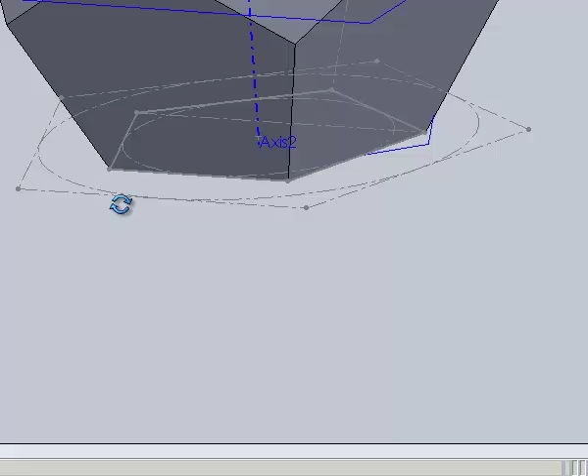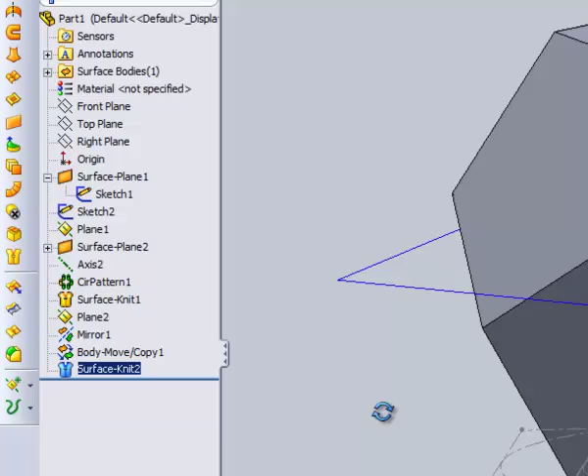Okay, in this second video, I'm going to show you how to create a flat pattern of your dodecahedron rod. Before we do anything, let's make sure that you've shelled your part, or your part was basically all knitted together. Your part should be one solid surface body. So if I expand surface bodies, I should see a surface knit here.

I'm going to go back into and edit this feature, and again make sure that when you form this, you say try to form a solid, so it is a solid mass. Okay, now let's shell the part at a 32nd of an inch, 0.03125, and accept. And now, like before, you should have wall thickness, and yes, we do.

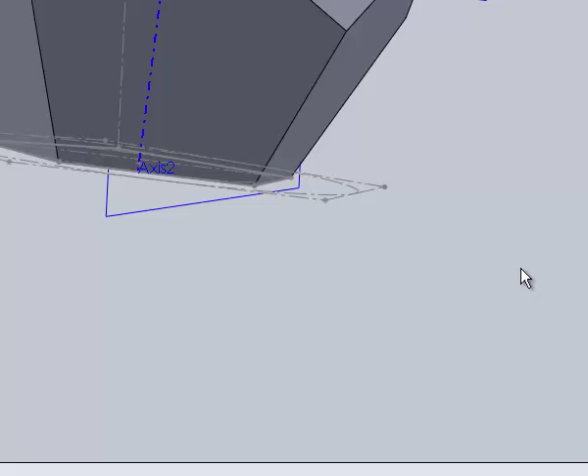Okay, now we're going to turn off our surfaces. So come up top, right. Turn off surfaces and right click and turn on sheet metal. Now we're going to do a command down here called rip. Create the gap between two edges. So SOLIDWORKS will be able to lay this part flat as a flat pattern or a net. So we're going to rip.

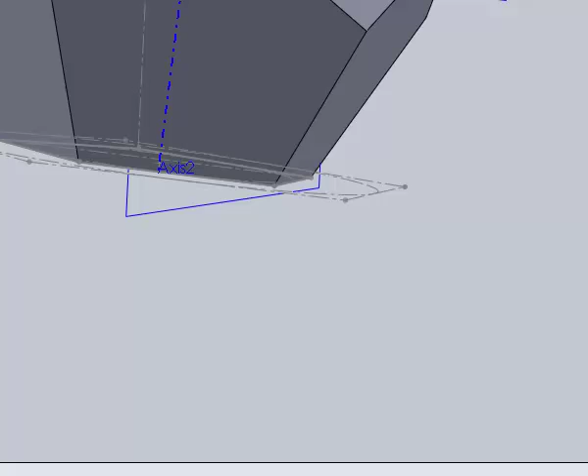You're going to go along the belt here and just start picking edges that are going to be ripped. We're going to keep this edge and this edge together because that's going to connect our two flat patterns of our six regular polygons. So let's keep going around. Oh, we gotta grab this edge and selecting the edges.

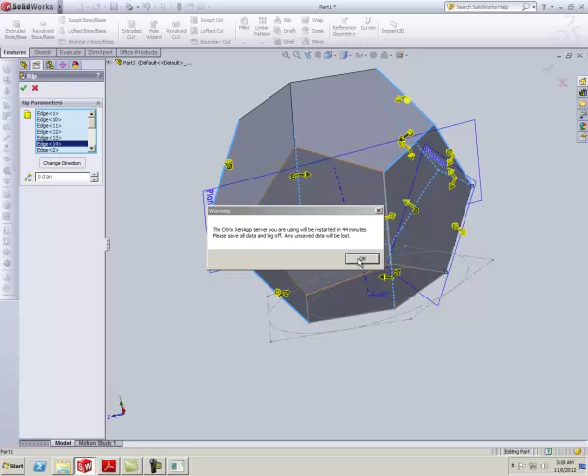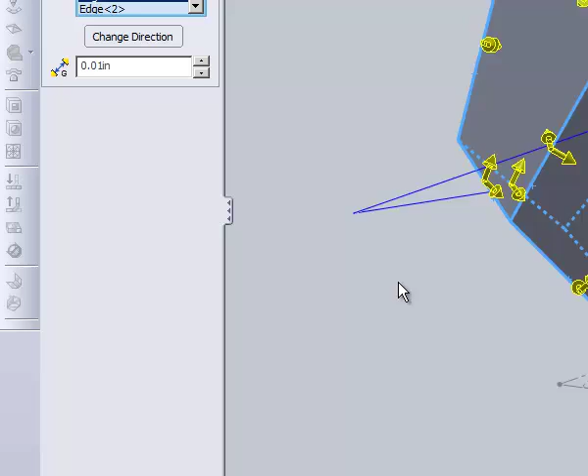You have to try and get your orientation. So there's quite a few edges that you have to select here. But again, we're going to leave this one right here connected, so our top and bottom of our flat patterns are together. Put a gap in here, a large gap to start with, so you can see what we just did.

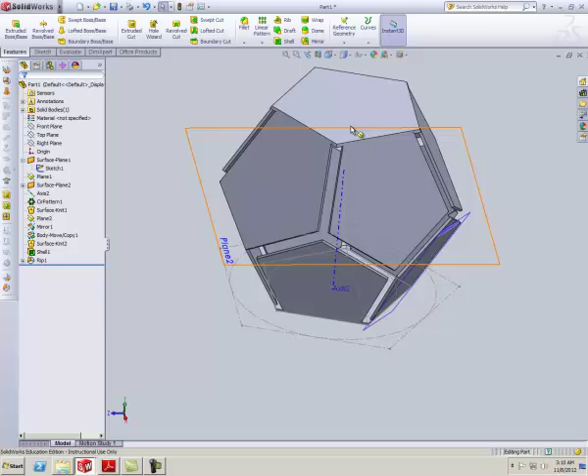Alright, now look at all those. We just create a separation, so when we lay this guy flat, it can lay flat. SOLIDWORKS knows how to do that. Alright, now we need to clean up a little bit of these edges here. So there's what's called a relief inside there, so they can be folded. Alright, so let's go back to sketch.

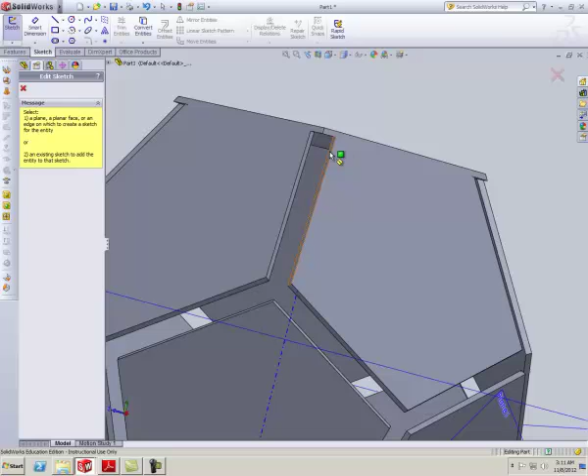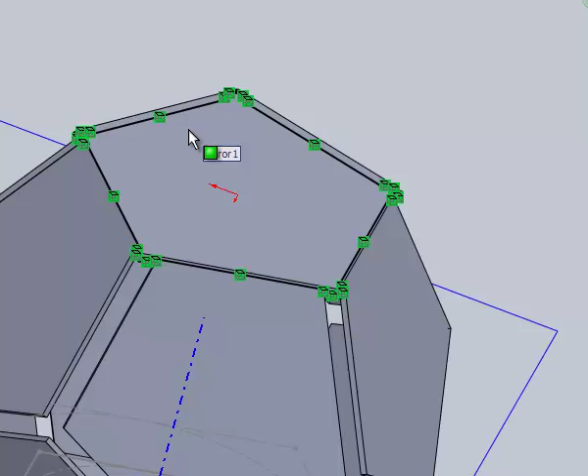We're going to start a sketch on this surface, on the underside of the inside of the top or the bottom. And then you're going to select a command called Convert Entities. You're going to convert the entities. It's basically make an outline of that face. You use that geometry to clean up these little areas here.

Now I'm going to click on trim. We're going to use power trim, so just dragging over lines that we don't need. That line we don't need. This line. This line. This line. And this line.

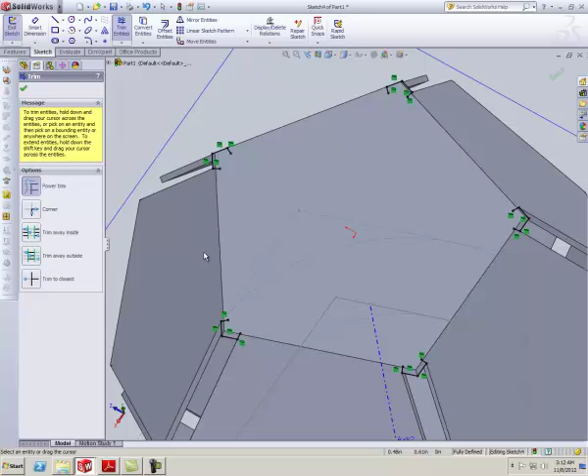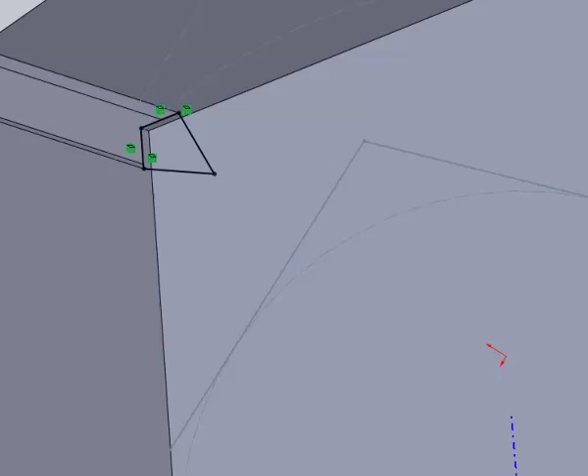Then we're going to use the command corner trim. So click on corner. Click on this entity, and then you just hold, don't click, just hold it over, and then it'll make the corner. So click again. That's good. Click. Hold over the other line. So you can do that for all 5 of these areas.

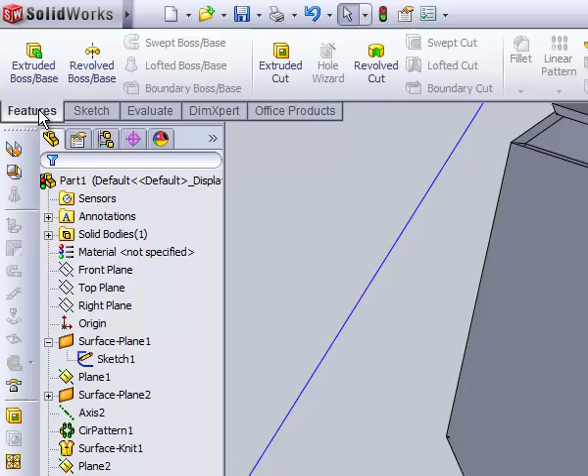Okay, once they're all done, we're going to go to our features, extrude cut, and then through all. Alright. Now let's do that for the other side.

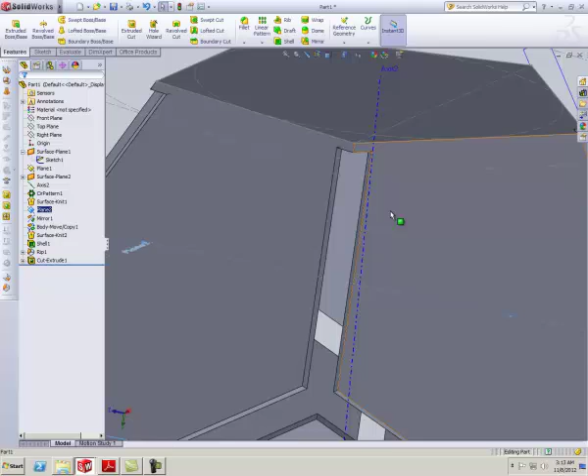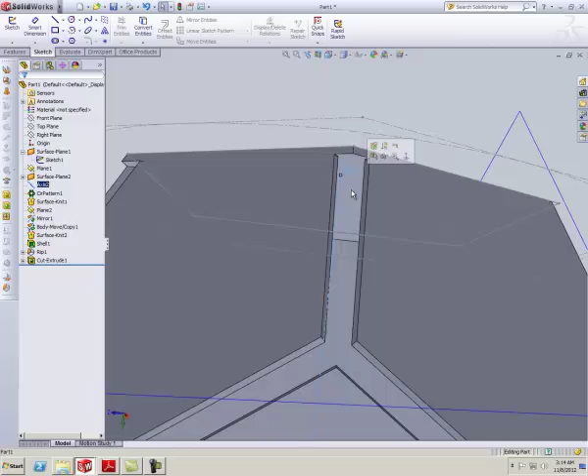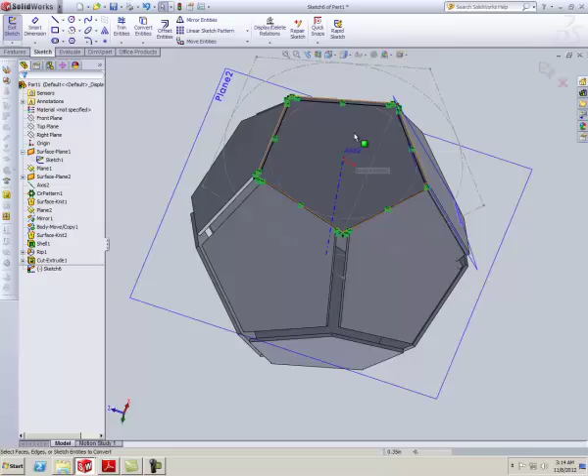Alright, sketch. No, let's exit the sketch. Let's select this, the inside of the other side, not the axes. Right, there we go. Now we're starting sketch on that side, and then we're going to convert those entities. Okay. Alright, same procedure as before. Use the power trim.

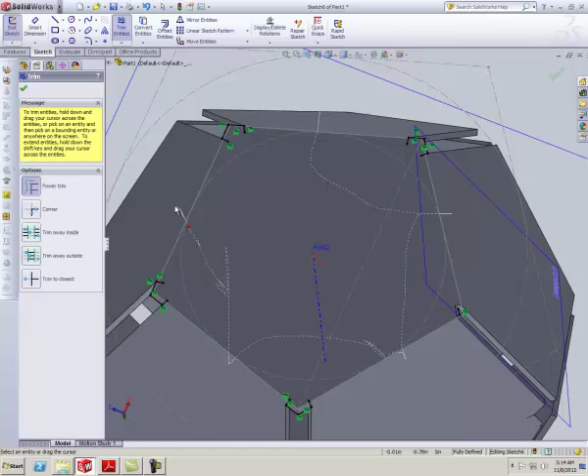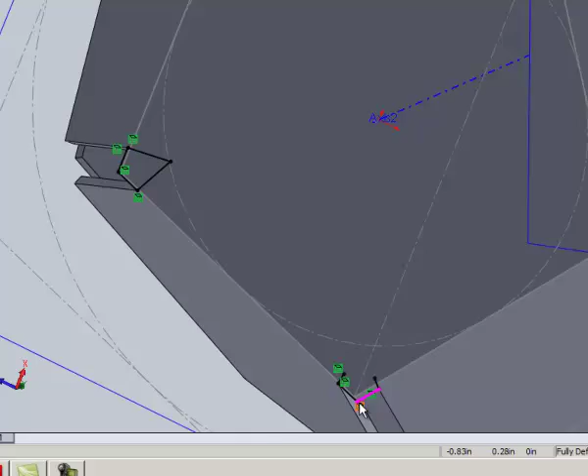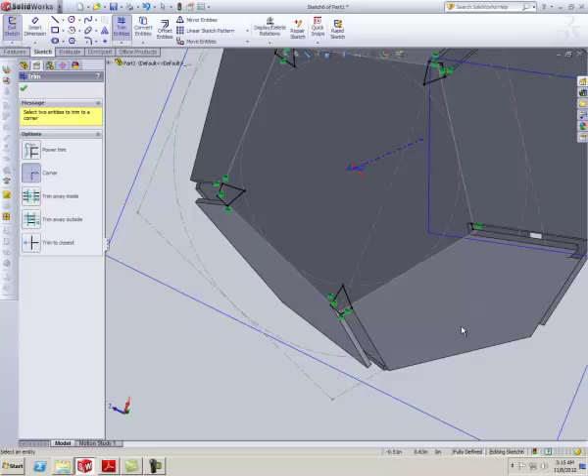Now we're going to corner. Okay. Let's go back. Something's up with this corner. I'll have to go back into and find out why it's not done correctly. Okay, let's accept this. Let's close the sketch. Now this part you're not going to do.

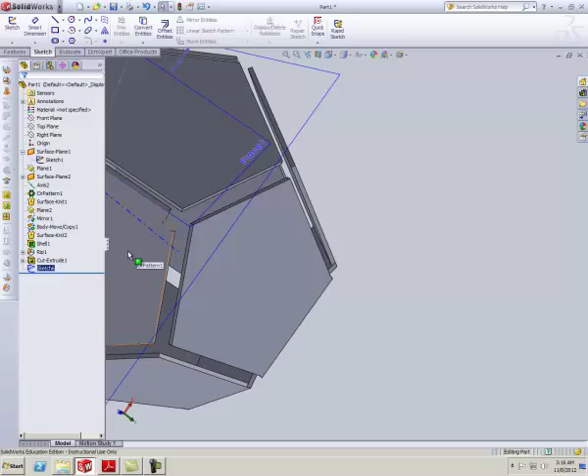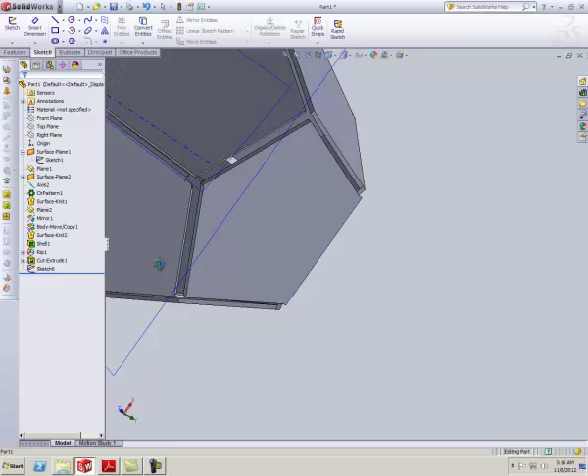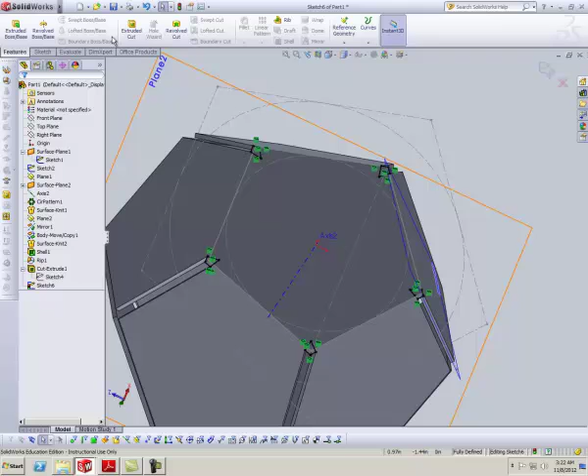I just got to figure out what's going on over here, and I think my gap is a little bit too large. It's overlapping. So I'm going to change this to 0.01. Let's see what that does. Okay, again, once you've created all those individual little sketches or intersections, we're going to again extrude cut this. And we'll say through all.

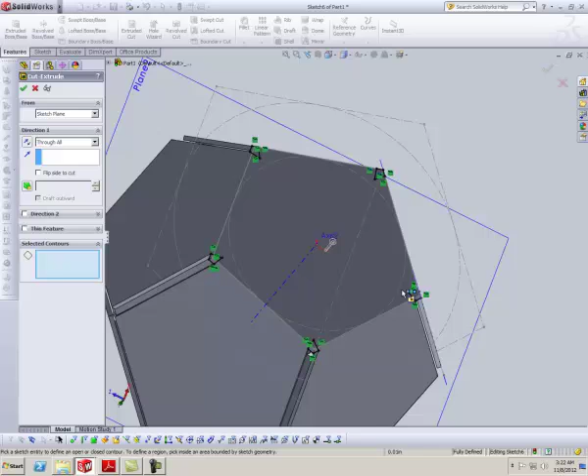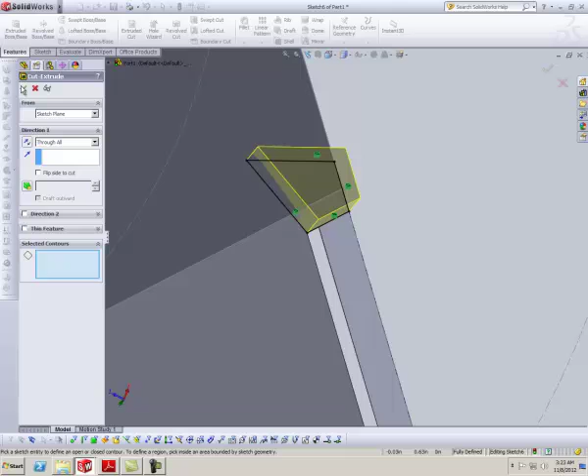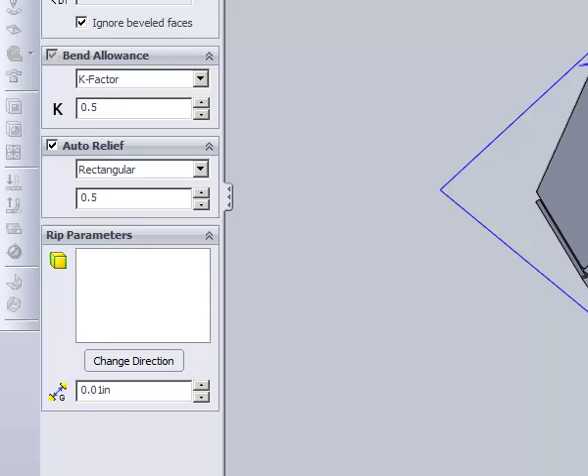Alright, where is my open contour? Oh, it's right over here. Let's go ahead and connect these guys. Alright, now I'm going to hit the F key that fits the page. Alright, now we should be good. Okay, come over to the insert bends. Click on insert bends.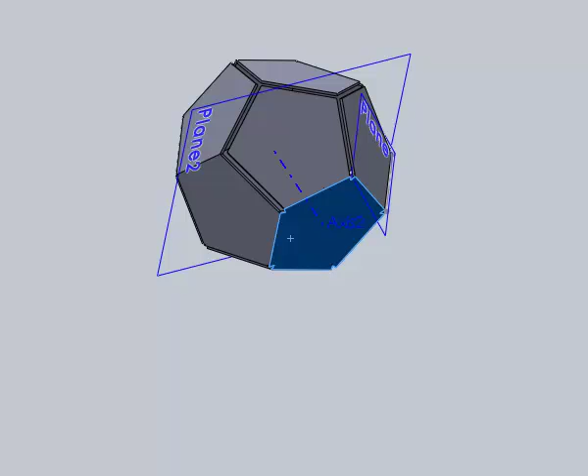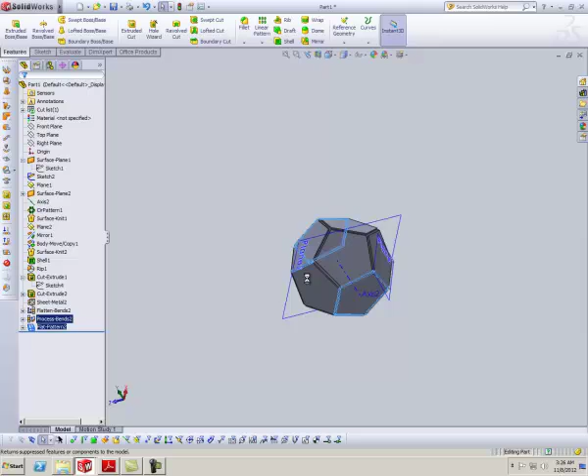Grab one of your faces, your fixed faces. Leave all the defaults. Accept that. And say OK. Now to make sure it works, you come over here to the flat pattern; it's already been suppressed. That's why it's kind of in gray. Click on it and go to unsuppress. And then voila, there's your two flat patterns of your dodecahedron. And these are all regular pentagons.